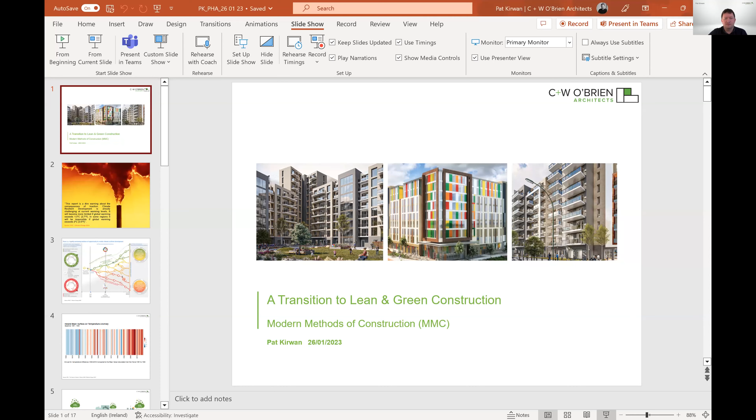I guess today, this afternoon for us here in Dublin, probably early morning for most of the participants. But today I'm going to talk about modern methods of construction and how do we transition between lean and green construction - implementing sustainability strategies through modern methods of construction, using lean design and lean construction methods to achieve sustainability goals. I think it's always good to remind ourselves, why are we doing this?

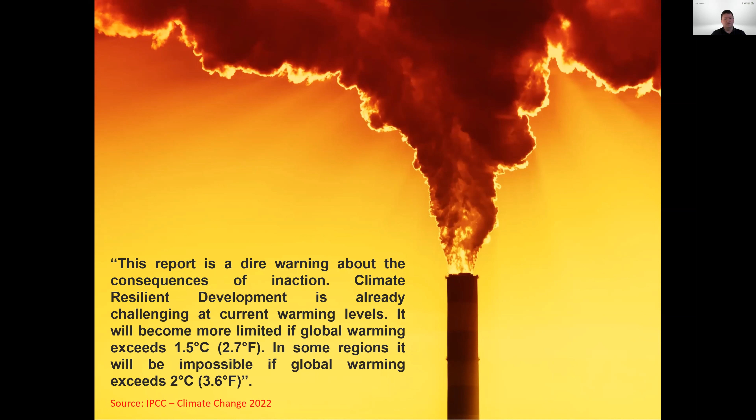Why do we need to really embrace a more sustainable, low carbon built environment, and particularly a construction industry? The latest report from the IPCC really identifies a critical need to tackle global emissions in order to reduce the impact of global warming, particularly as we perhaps begin to look at exceeding 1.5 degrees Celsius. Just a brief summary from the latest IPCC report captures that we're absolutely at a critical path.

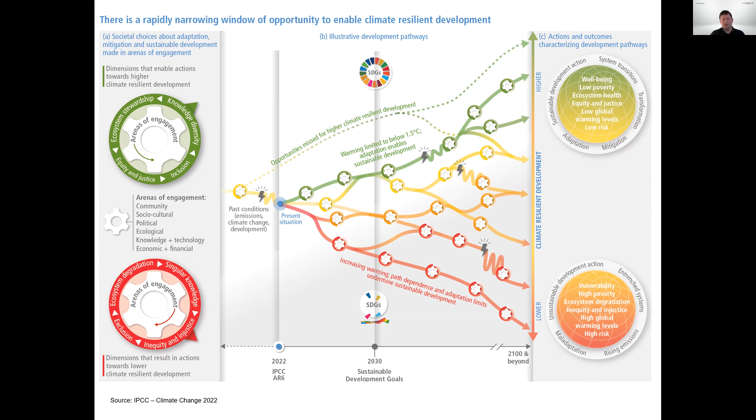We're at a crossroads where we've already missed certain opportunities to really embrace and tackle climate change. And we're now at the critical juncture where we need to start actioning, we need to stop talking and actually start doing. And yet, in terms of the present situation, we can really drive on in terms of tackling the impacts, or we can carry on with business as usual and end up with significant issues in terms of that global warming impact.

I think we always generally see in life, we say, issues don't really affect us. It's someplace else, that's in another part of the world, not really impacting here. I don't really see the change.

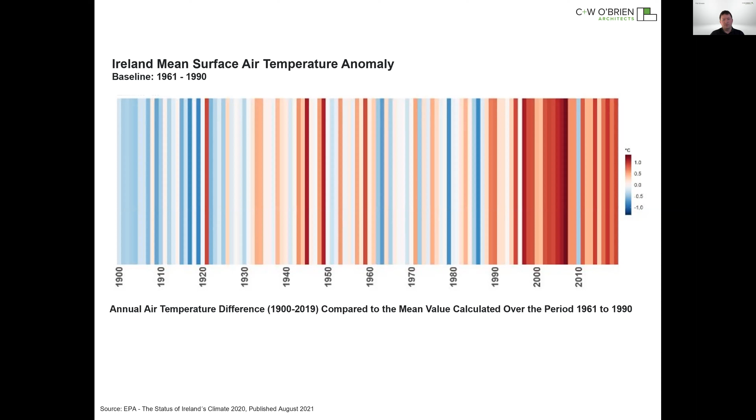So we do need to begin to action those issues. And how do we action that? We're all here, we're all involved in the built environment. The built environment, according to the World Green Building Council, contributes approximately 39% of global carbon emissions annually. That's a significant impact when you look at the physical act of construction. So it's imperative that those actors, those participants within the construction industry, really build the knowledge and start actioning on that.

If we look at that 39%, you can see the breakdown: 28% in terms of operational carbon and 11% in relation to embodied carbon. I think we're beginning to look at the operational carbon, the likes of passive house methodology, fabric first approach, reducing the impact, really new innovative technologies in terms of low carbon technologies, etc.

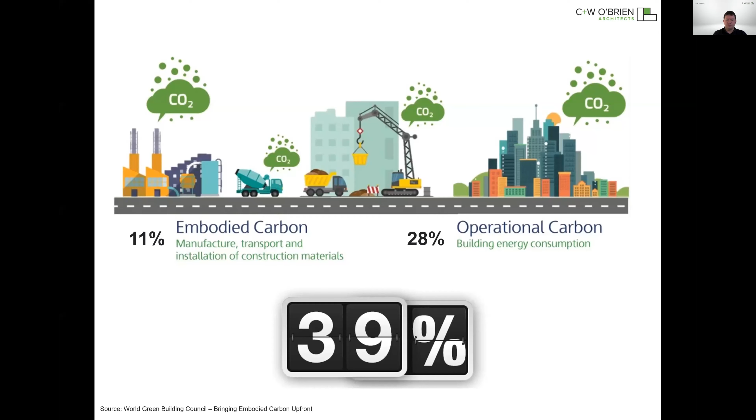But also, all of those new technologies, all of those new methods that we're deriving to reduce the operational carbon also have an embodied carbon impact. So we need to start looking at a holistic approach to carbon, not just the operational carbon, but right through the process, from the materials, from all aspects.

And how do we do that? Again referring back to the World Green Building Council chart, the absolute optimum time to do this is at the early strategic stage in terms of any project, our planning, obviously to reduce the impact, we build nothing. We can't do that. We're growing global population.

We need to start building more. We need to start building infrastructure and critical facilities such as hospitals, schools, etc. So we need to look at that. The next impact, the next opportunity, we perhaps build less. So we need to look at using existing assets, deep energy retrofitting. How do we impact that?

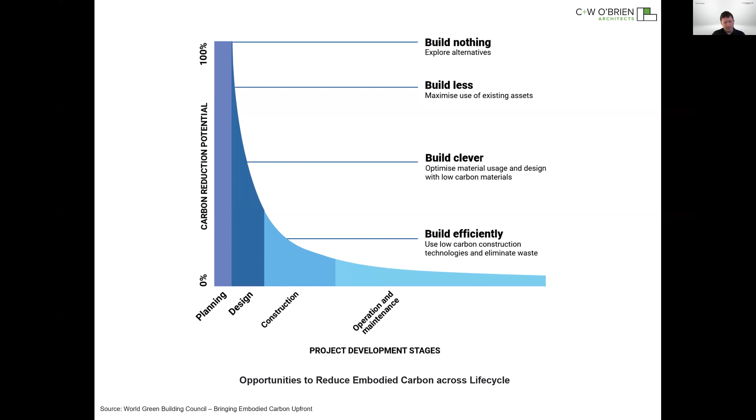So then referring that back to modern methods of construction, how do we take modern methods of construction in terms of a deep energy retrofit and look at the carbon impacts of that? And obviously then we need to build clever and build efficiently, but we need to tackle that at the early design stages, at the strategic stages. And what does that impact? I guess this graph or graphic really shows the impact of that at design stage.

In my view, I think the design phase is the critical point, because at the design phase we're designing the building, identifying how it's going to be built, and perhaps the construction methodologies, which then has a direct relationship on the natural resources, the raw materials, how the raw materials are made. Then going forward into the production and manufacturing process, again the construction methodologies that we define to build the asset we've designed will have a direct impact on the production.

And how we design - are we designing for reuse, re-adaptability at the end of the life cycle of the asset, and then how do we recycle the asset at the end? So it's a circular economy, that circular process, which again in my view starts at the design stage. It's critical that we as designers within the built environment build the knowledge and start addressing that.

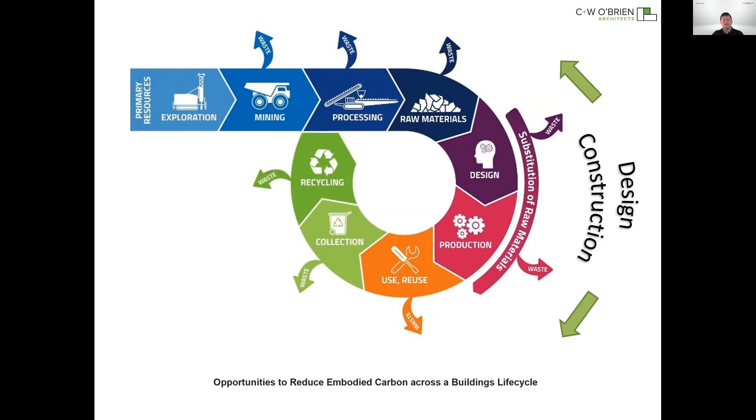In terms of the physical act of construction, the physical act of design, we can look to other industries such as the automotive industry in relation to more efficiency, more optimization. And this is where we start to look at modern methods of construction, prefabrication, etc., and again looking at a lean approach.

But if we apply an environmental aspect onto that, so again, identify customer value - what are the environmental goals of a project, of a built asset?

Identify and map the value stream, develop up a roadmap, bring that into the design phase. How do we integrate that? What is a plan of work for integration of sustainability right through the entire life cycle of the asset?

Obviously, create flow by eliminating waste. We have many wastes, and I'll come to that in a second. And then respond to customer pull, so again we can respond to the ongoing environmental changes that might be occurring, be it legislative or climate change.

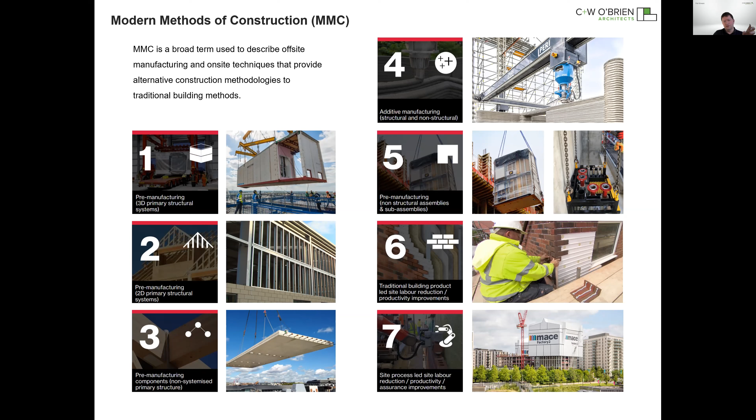So it's not just one particular element. The key here is to look at all of the various aspects of modern methods of construction and see how they play their part in regards to improving the environmental impact.

A case study here from London, developer the Mace Group, looking at a very innovative modern method of construction and methodology of developing up a residential development, 524 apartments across 2 towers, and the anticipated result is a 70% reduction in construction waste and transportation, etc., using modern methods of construction over and above building traditionally.

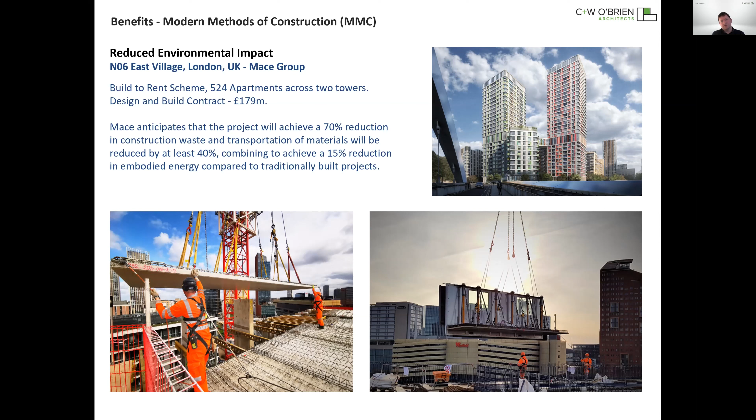So we can see that by using modern methods of construction, we're reducing the waste by approximately 70%, if that building was built by traditional means. So I think that the case studies here prove that modern methods of construction do reduce waste.

And again, another example for a project currently under construction in Croydon in London, a full volumetric modular tower. It will be one of the tallest volumetric modular towers in Europe, and perhaps in the world, once complete, at 44 stories. A study carried out by the University of Cambridge saw approximately a 40 to 54% reduction across the 2 towers in embodied carbon.

So again, it's looking at developing up the business case in terms of getting the quality, getting the productivity improving, and then actually really targeting in on the embodied carbon and looking at the materials. Why is this building achieving such a reduced embodied carbon impact?

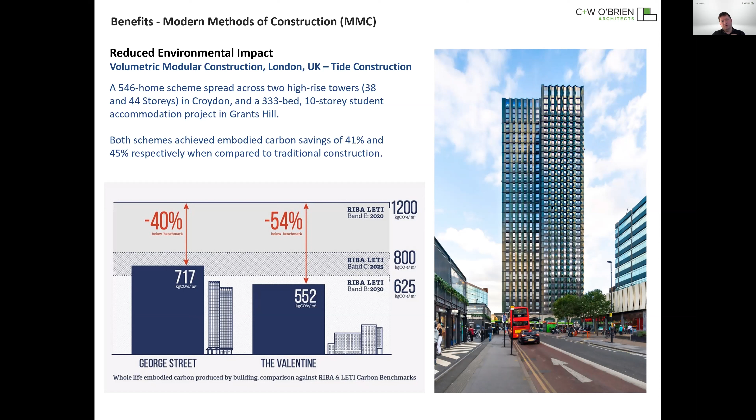Again, you can tease out in terms of the primary structure, less concrete, and more efficiency in terms of the materials, the lightweight approach to construction. So again, we can see here from a case study, it actually does work in terms of reduction in carbon.

And again, if we talk about sustainability, it's not just about the carbon impacts. We look at ESG, environmental, social, governance. We look at the social aspect of sustainability, and we can see from a health and safety point of view that modern methods of construction can really improve the health and safety aspect.

As an example here, again going back to the case study by the Mace Group, products were used where we had a facade system connected to a floor plate lifted onto the building, so the leading edge of the building was fully protected.

You can see by the image significantly reduced labor on the actual floor plates. So the risks are mitigated, the risks are reduced of health and safety impacts. And if we refer back to the Irish construction industry, in 2019 we had a 140% increase in fatalities in Ireland in the construction industry. The vast majority of those were falling from heights. So again, we can see the benefits from a social point of view to using modern methods of construction.

So what are the drivers? How do we really push this on? There have been lots of national strategies that begin to tackle this. Here in Ireland, we have the Climate Action Plan, which begins to articulate the need for embodied carbon in new developments. And we can see that in London at the moment in terms of very high profile developments being refused planning consent because they're demolishing existing buildings and building new buildings. So it goes back to the reuse and readaptability of the buildings. In Denmark, they are a world leader in this. They've now mandated the use of embodied carbon calculations within their building regulations, using the circular economy and beginning to promote and tackle embodied carbon within the built environment through modern methods of construction.

Thank you, Ben, for the nice introduction. It's great to be part of this. Before we go into a short video on Vision Built and the business and what we're about, I think it's a really interesting, exciting time in the construction industry. As Pat mentioned, we have a number of burning platforms. Embodied carbon and our need for sustainable construction is a burning platform that's going to really accelerate the drive, and you can see it already from modern methods, because we have to change. And modern methods of construction has been around a while in various different forms going back many years, but I think it's different this time.

I think we have a number of enablers like digitalization, we have the technology. We have burning platforms, which Pat mentioned, our need to drive down carbon. And a big element also is the change in our skill set. Our people and the traditional trades, the apprenticeships, they're not there anymore. So we have to innovate and come up with different ways to create built environments. And that's why it comes back to a factory environment. I think that's why it's a really exciting time to be part of the construction industry, because that kind of flat line, or even declining, graph around efficiency in construction, I believe is about to change, and about to change quite drastically. And I think we as professionals in the industry can really make sure that it changes in the right direction, with quality always in mind, and driving down that carbon.

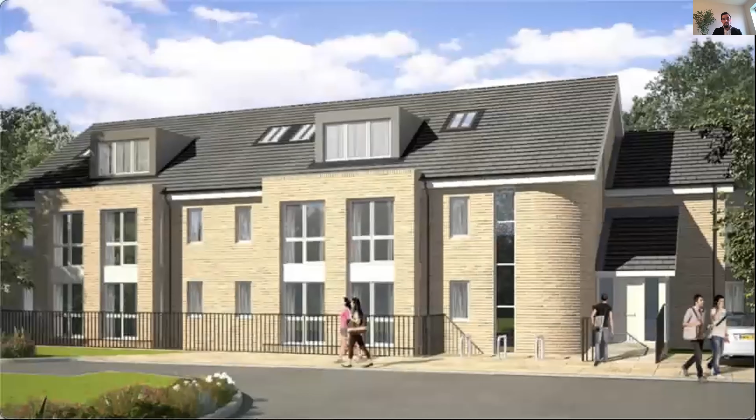We operate in the education market, the housing market, and also the commercial market. Here in Vision Built, we predominantly are a modular volumetric product, which is a Cat 1 product in terms of offsite MMC. Traditionally, we would have done a lot more Category 2, which is 2D panelised light gauge steel. What we found in the market is that our customers and ourselves, in trying to continuously innovate and do more offsite, our volumetric offering allows that ability.

We get a lot of the fit-out trades and finishing trades done in the factory, which takes away the risk from site. We've also found that doing more work in a controlled environment, not dealing with weather issues or site constraints, can greatly increase the quality of our product. So managing all the technical details - air tightness, getting the right U value, thermal bridging - managing all that quality of work is a lot easier and more controlled in an environment that's easier to work in.

Our volumetric modular solution is a base product of light gauge steel. First, that's panelised in our 2D facility, and that panel is then used to form the box that creates the 3D environment for us to fit out with roofing, cladding, windows and insulation - all the follow-on works within this module. The modules can range depending on product and project, whether it's a school, education building, or a house, and can vary slightly in degree of finishes.

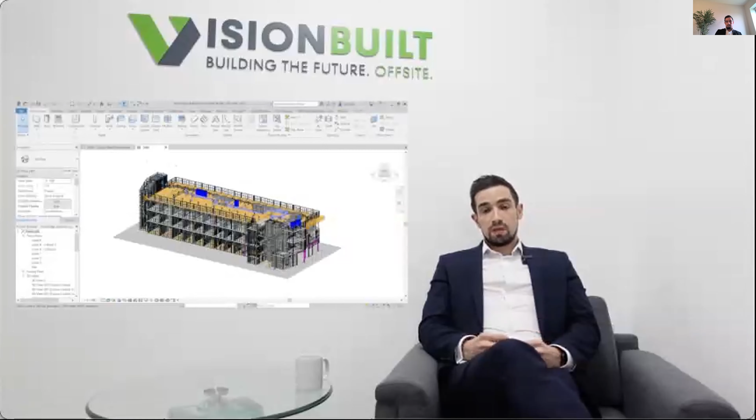Compared to traditional construction, off-site volumetric construction requires design and procurement up front. So one of the challenges is getting that information to allow design freeze, to allow us all to collaborate well together earlier in the project.

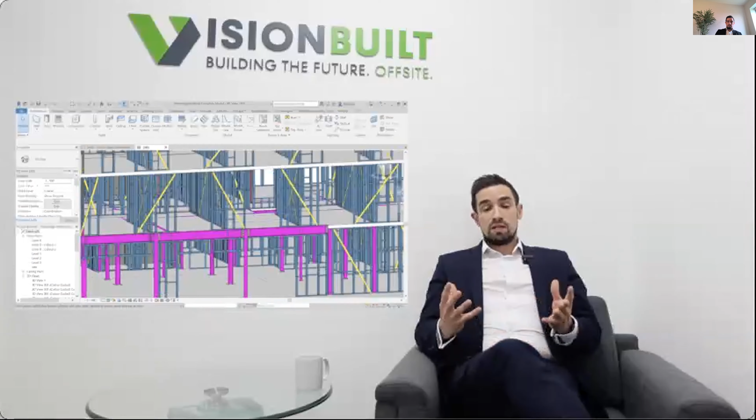You're constantly de-risking the project, but once you go into the factory environment, you want to have all the details right, down to your light location, your socket location - all that level of detail in the design that allows the manufacturing process to continue through the factory unimpeded. That's one of the challenges we have in construction: changing that whole mindset to front load the activities.

There are tools and digitization, virtual construction, AR, VR, that can help us visualize the finished building, get that design up front, allow design freeze, and allow a very streamlined process after that.

Predominantly our customer base is government bodies, Department of Education, and housing sectors. We also work with developers and some commercial clients and office buildings.

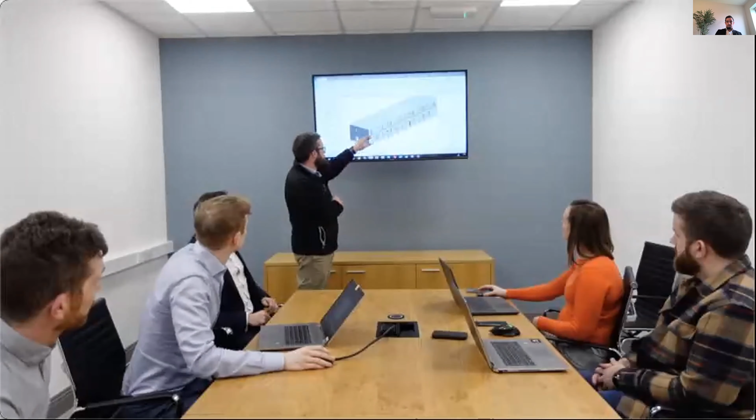Our process in the company involves a lot of in-house design. We've got a hybrid model where we outsource some of the specialist consultants' work, including fire and structural at times. That allows us flexibility to scale up and scale down depending on demand. Here in our head office in Galway is where most of our design department work happens.

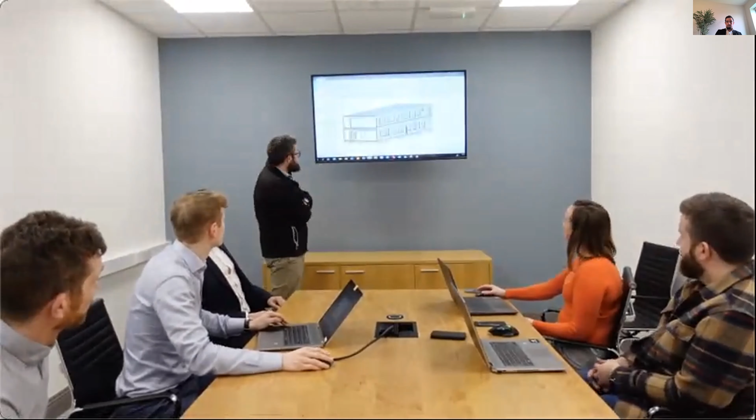We predominantly use software such as the Autodesk suite, Revit and Navisworks. We also have specialised software, Vertex framing software, that allows us to have a CAM process, an automated process right to the factory floor. You'll see some of our framing machines that allow this process to happen through the Vertex software, digitally transcribed into the framing machines, which then manufacture our steel exactly to that detail and design in the model. So it's highly automated, highly efficient, with very little waste in the process right from design to the factory floor.

So a key tool we use right through our design and manufacturing process is our BIM modelling. Our designers model in a complete 3D world where we basically have a twin model of the building. These digital twins are utilised through our manufacturing sequencing and our detailing.

A lot of this information is utilised to communicate from the design department to the factory floor. All our production supervisors are trained up in reading the BIM model, taking dimensions off them, understanding how complex components go together, all in that virtual world where we can tease out issues.

A lot of the process then is through a DFMA, a design for manufacture and assembly process. I think one of the big changes from a construction project to more of a manufactured off-site product is the level of detail that we get into in our design. We like to get to a place where every component is labelled, marked and kitted, and that component then has various different uses, but can be easily and efficiently put together in a way that everyone understands.

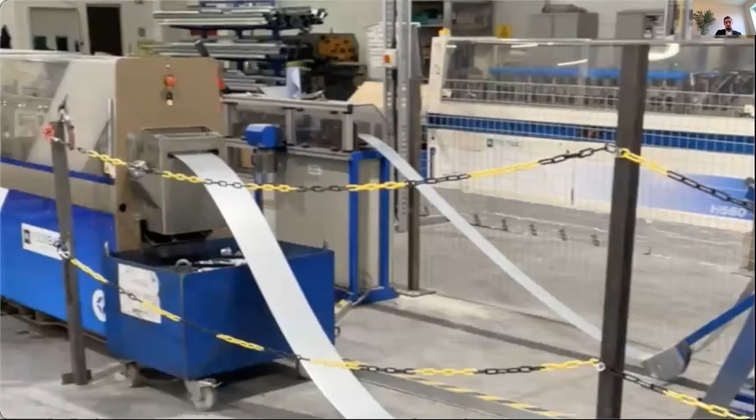Our manufacturing process starts with our raw material, which is typically coil steel. That's brought through our framing machines. We've 5 different framing machines that swage, punch and roll at different depths, different thicknesses. That allows variety in our products, whether it's a floor assembly, a wall assembly, or a roof assembly, there might be various different build-ups needed.

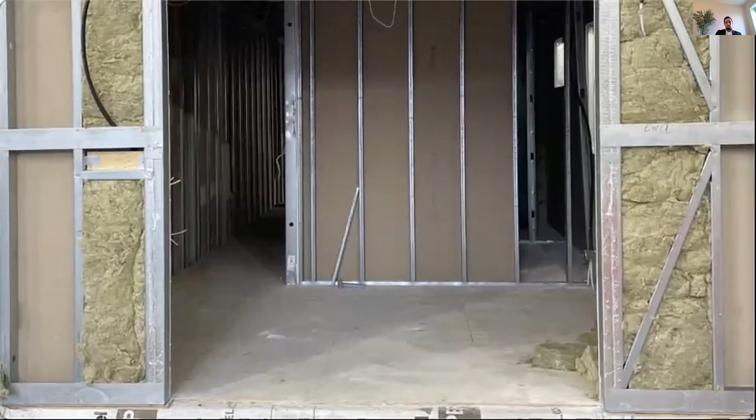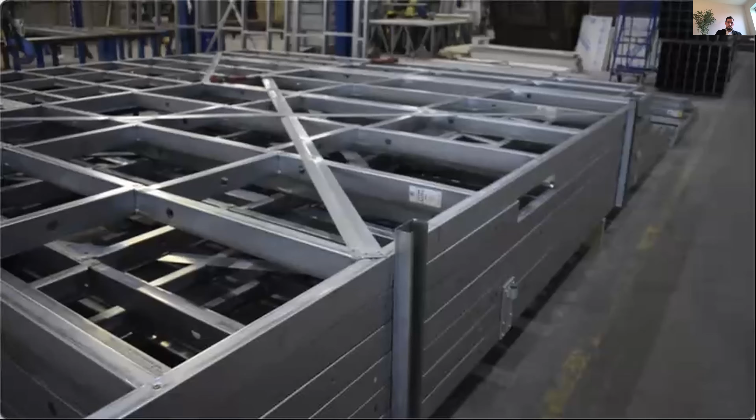While that product is rolled through the framing machine, each of those components is put together into a panelised product. That panelised product is configured, typically screwed together, and that panel then is used in our 3D volumetric solution. In the pre-assembly or sub-assembly part, we might apply our insulation, our boarding, etc. The various different build-ups are done on a flat table, lifted into a vertical or horizontal position depending on floor, walls or roof, and put into a volumetric solution.

That then allows all the follow-on trades to work in that environment. That's the process sort of from start to finish in the factory.

In terms of our capacity, we range from about 700 units to 1,000 units per annum. That can vary depending on what type of building we're doing, whether it's an education building or a housing building. One of our largest customers is in the education sector. We do a lot of schools here nationally.

One of the key advantages for offsite manufacturing is the speed, and I suppose the quality of the product that you can get in the factories. The education department have a real challenge in terms of capacity nationally, particularly in primary schools.

So what we can do is we can turn around buildings in quite a short period of time, especially when we've a kind of standardised approach to the layouts of the buildings, the classrooms, typically what they want. We've worked with the Department of Education in terms of getting them layouts standardised that suits modular construction, and then we're able to roll them out quite efficiently and at a high speed.

The Department of Education sector really requires a speed of build, but also a really high quality product that will last for centuries in terms of environments for kids and teachers to work in. So what our product offers is a very low U value, really high energy rating on the buildings, and this is down to the thermal bridging details and the products that we use in it.

I suppose acoustics is a huge thing in schools, so how we detail our wall construction, floor construction, and all that side of it is really critical. This is worked through standard details that we've rolled out and agreed with all parties. Also, I suppose from a fire rating perspective, fire regulation is really important.

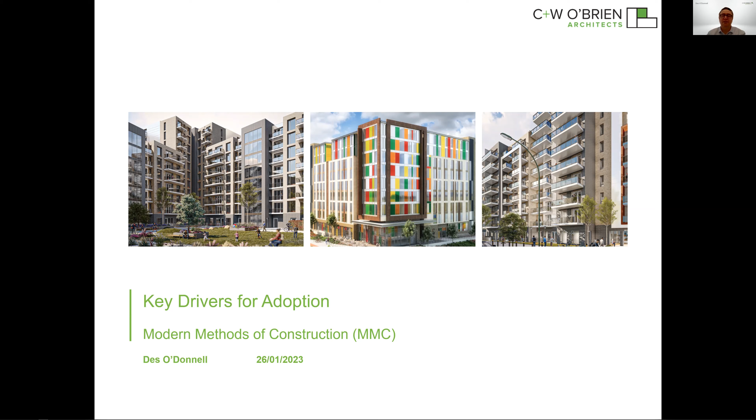Economic conditions, economic downturns leading to demands for construction, result in reduced productivity. Government regulations and policies affect compliance requirements, and lack of standardization in construction progress leads to increased costs.

Technological gaps - the construction industry has been slow to adopt new technologies, which can lead to increased inefficiencies and lack of transparency. Then there are environmental concerns and budget constraints - lots of constraints in relation to budgets that limit projects and have an impact, reducing productivity, and safety concerns.

And generally a lack of involvement of competent contractors in a project results in wasted time, and often designs are fully developed before the realisation of constructability can be met. So you end up redesigning, retendering, and this results in a substandard product.

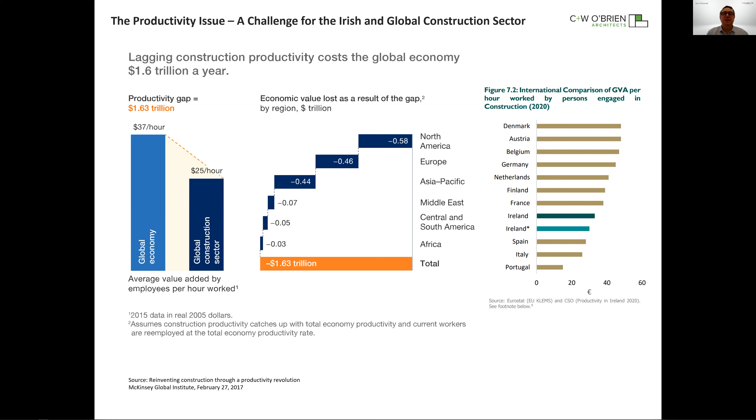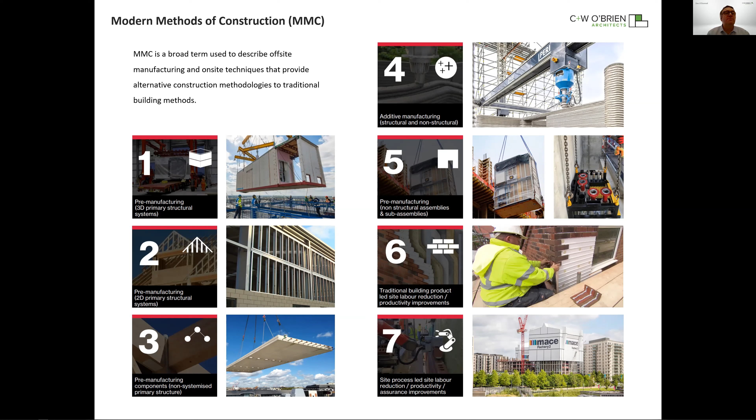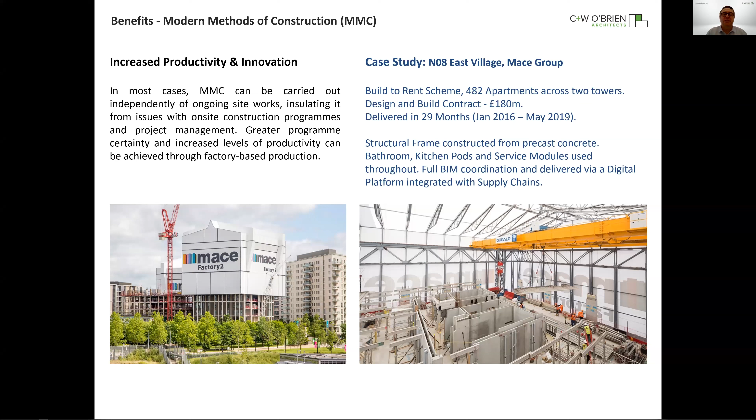Pat sort of touched on these earlier. These are the 7 categories of MMC, going from 1 to 7, basically showing the 3D primary structural systems down to number 7, which is the use of different technologies to enhance construction. Using different technologies here, not just one form of MMC, but structural frame, precast concrete, bathroom pods, service modules, implementation of digital platforms, and this jump factory where they can construct things on one level while preparing for the next, working up through the buildings. This really improves and increases productivity, giving reduced construction times, improved quality control, cost savings, increased design flexibility, safety, and increased sustainability through the use of technology.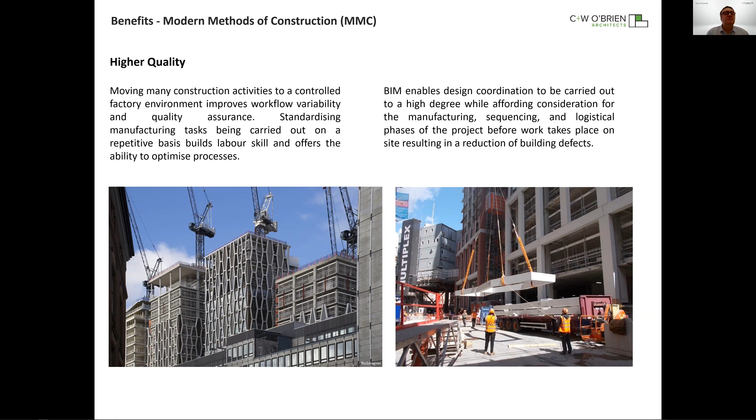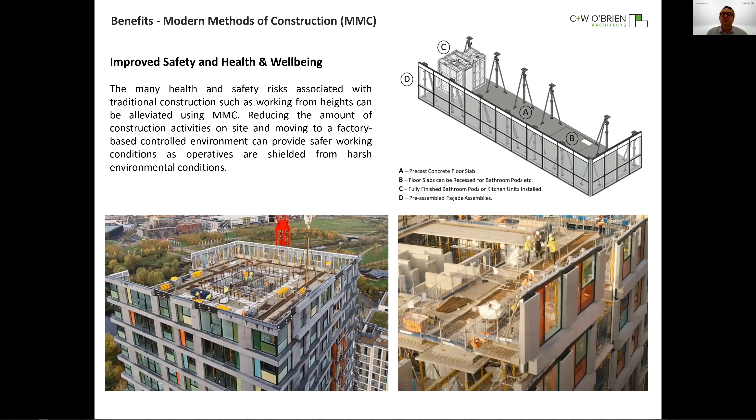That also leads to higher quality buildings, giving greater precision, increased durability, greater energy efficiency, and design flexibility. This is another example showing how this can improve the benefits: reducing on-site labor, fewer accidents and injuries on the construction site, improving working conditions because a lot of work is done in factories, increasing safety in use with more durable and longer lifespan prefabricated elements assembled on site, improving air quality in buildings through prefabricated components made from sustainable materials, greater design flexibility for better geometric shapes and forms, and innovative building designs that take into account occupant well-being. By using MMC techniques which enhance design, fabrication, and assembly, you add greater precision and accuracy in the final product, resulting in smarter and better built buildings.

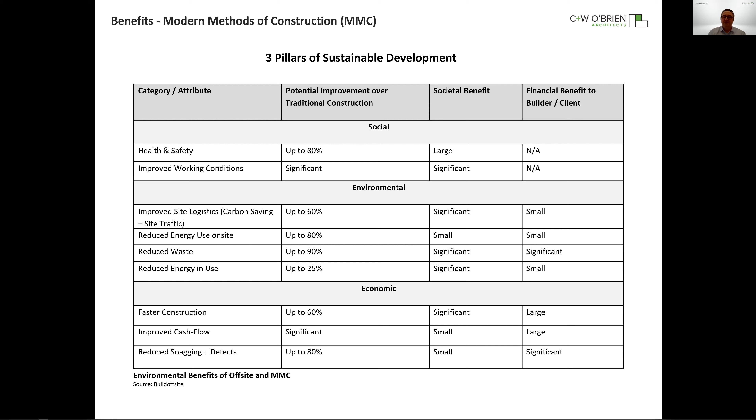So what we need to do is increase awareness and education among the different stakeholders, showing them the benefits and potential of MMC, developing a skilled labour force to work on these projects, and try to reduce the initial costs of MMC and the equipment and machinery needed. We also need to develop a robust supply chain for MMC products and components, and address the regulatory barriers currently in place that make it difficult to implement MMC techniques under existing codes and regulations.

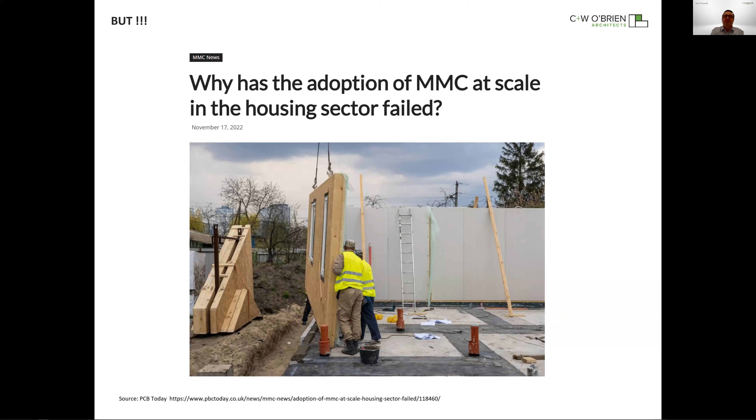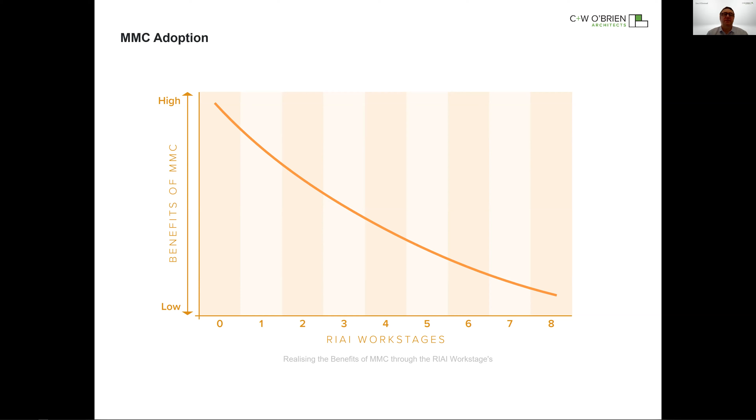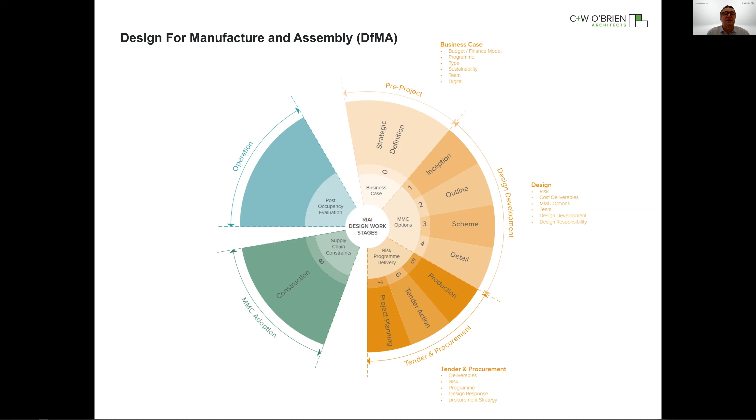Looking at this at the various stages, the best way of enhancing productivity and getting realized solutions is to look at it from the earliest stage: design, cost deliverables, MMC options, doing different options at the earliest stage all the way through to tender and procurement, and then adopting it.

The key benefits for design are increased efficiency in the design process, improved constructability, reduced waste, enhanced collaboration, improved quality control, and better integration of building information modeling, which can also help enhance the system.

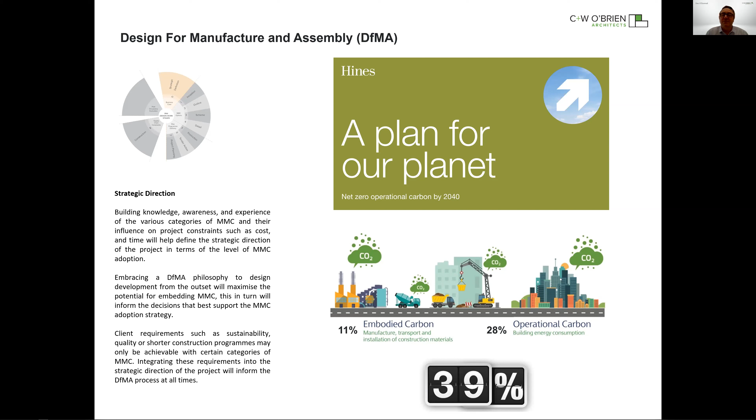Greater flexibility and adaptability allow for manufactured modular prefabricated components that are easier to adapt to changing project requirements. This also enhances sustainability by promoting the use of sustainable materials and methods, resulting in lower carbon emissions and greater resource efficiency.

Looking at different stages, in a typical apartment situation you have different systems - things like bathroom pods, kitchen pods, wardrobes - and these can all be implemented during the design stage.

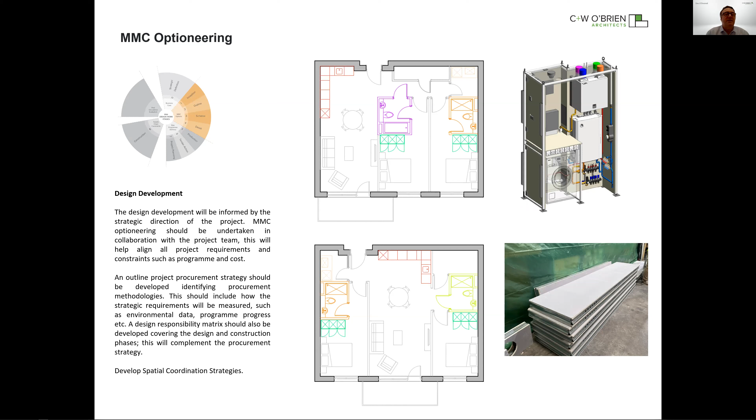The benefits can be seen by having mass production of modularization, which adds speed and quality and addresses all the issues we went through earlier.

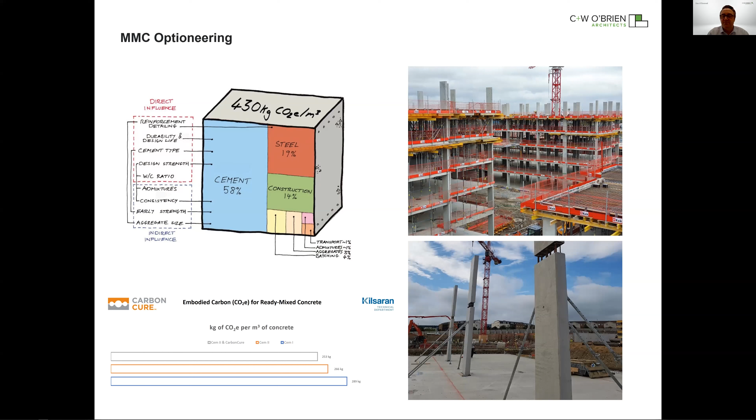By pumping CO2 into the process of constructing the concrete, this reduces the actual embodied carbon, giving you the double benefit of speed of erection and quality, along with enhanced sustainability of the end result. And that's it.

The use of modern methods of construction is crucial for the construction industry to meet the challenges of sustainability, resilience, and affordability.